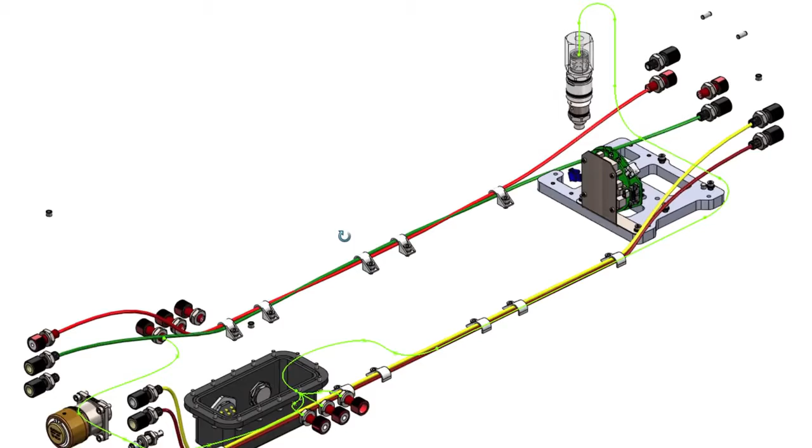If everything we design only was a square or rectangular shape, we would never need to use splines. In the electrical world, the path of electrical wiring and harnessing can take many forms, including lines and splines. In SOLIDWORKS Electrical 2021, we enhanced route harness functionality to now support the use of both splines and lines to create route paths.

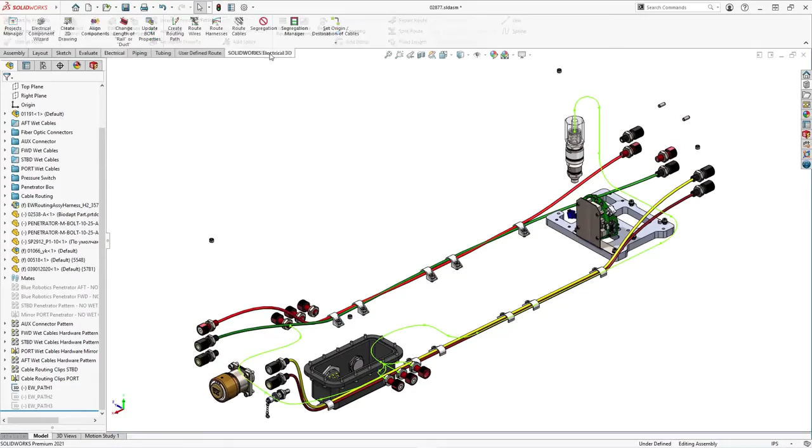We created a routing path using both splines and lines for the harness that connects the transducer to go under already routed cables and follow along the wall. Let's adjust several of the arcs and curves to obtain a smoother path. In the Electrical 3D tab of the Command Manager, choosing Route Harness opens Routing Harness, where you'll find new options to route with splines.

After routing is finished, the harness followed the predefined path we created. To finish up this harness and reduce waste of material from cutting 3 conductors shorter than the longest wire, we will add the splice to the wire so all conductors in the harness are cut to equal length.

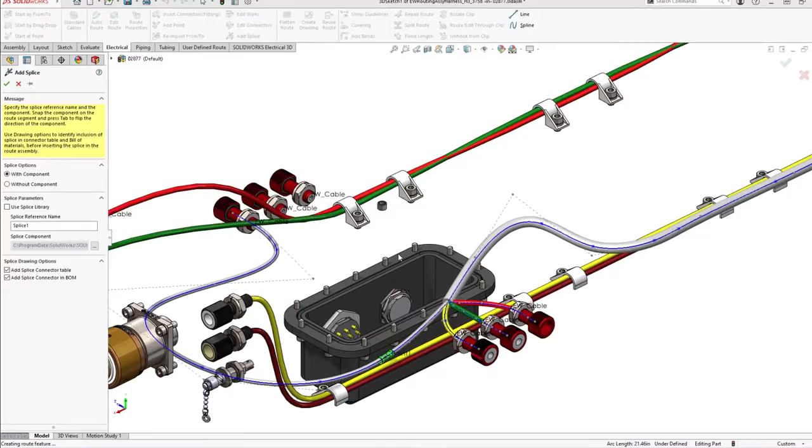Supporting splines, along with lines and arcs in creating a routing path for electrical harnesses, greatly improves the versatility of routing electrical harnesses in geometrically complex products. It is a common practice to have multiple cables starting from a single connector and then have each of the cables go to different parts of the electrical system.

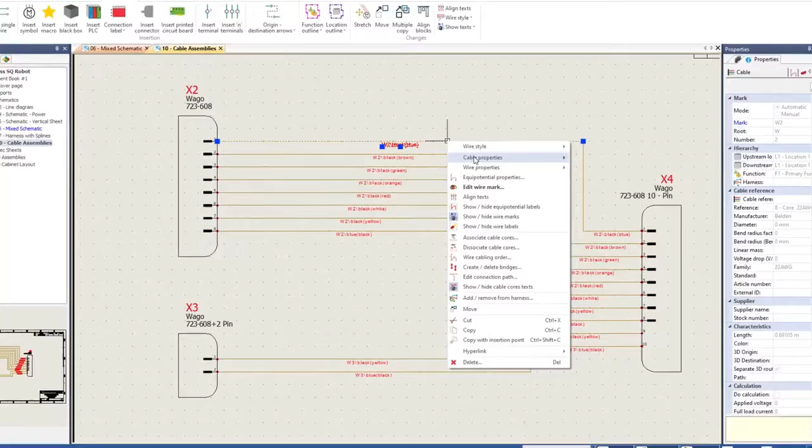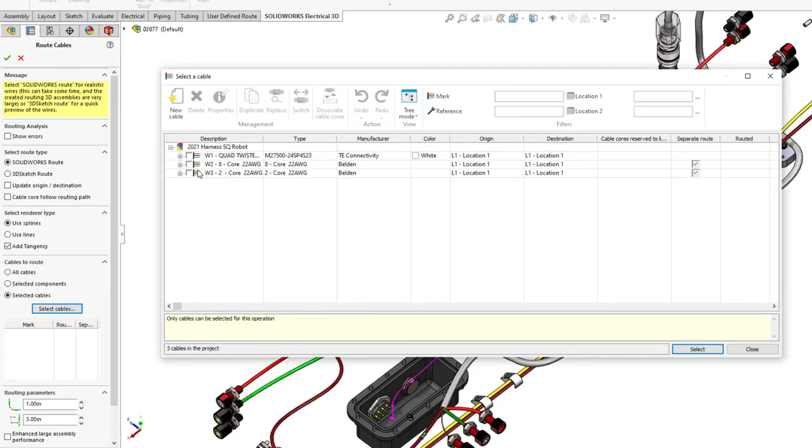Routing all these different cables as a single assembly does not provide the flexibility designers want. In SOLIDWORKS Electrical Schematic 2021, we improved cables' properties by including the new field Separate 3D Route Assembly. The same parameter can also be controlled in the SOLIDWORKS Route Cable command to provide maximum flexibility to users on how and where they want to initiate this new parameter.

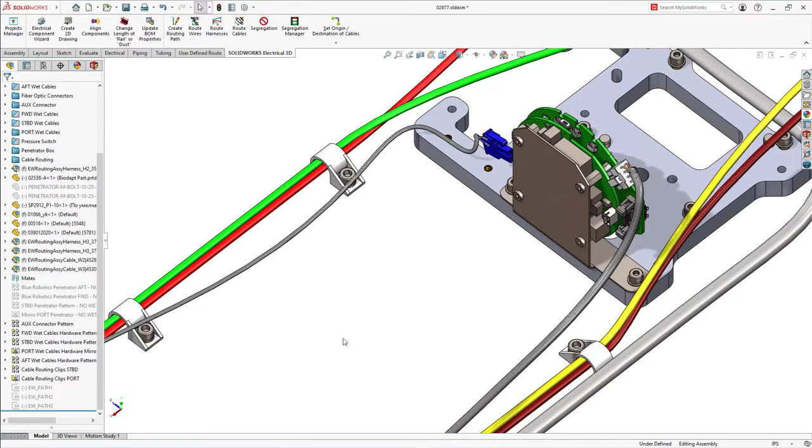We already created 2 separate routing paths, one for each cable starting from the round 10-pin connector that brings signals from the outside world and connects to the PC board that controls navigation sensors. We will choose to route these 2 cables at once and as separate assemblies.

These new separate routing assemblies of cables allow designers to create more complex and more feature-rich functionality by bridging the needs of mechanical, electrical, and electronic